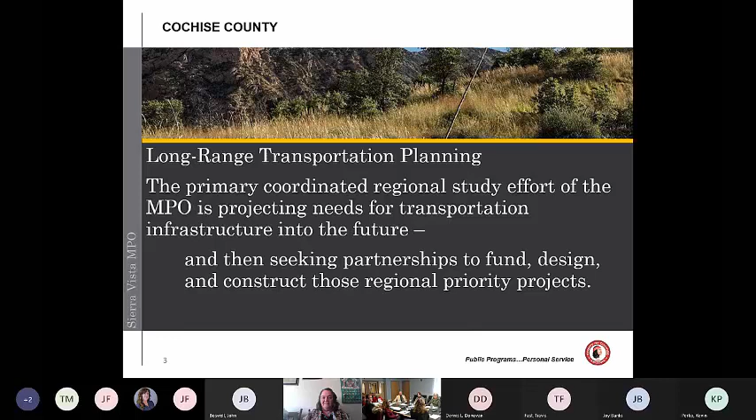These priorities are very familiar to you: safety, system preservation, regionally significant, those kinds of elements. From that came a prioritized list of the top items within the region that the MPO felt it should focus on from a study standpoint and a funding standpoint. We are primarily a planning organization with a tiny bit of funding for construction, kind of like a carrot, saying, let's all get to the table together.

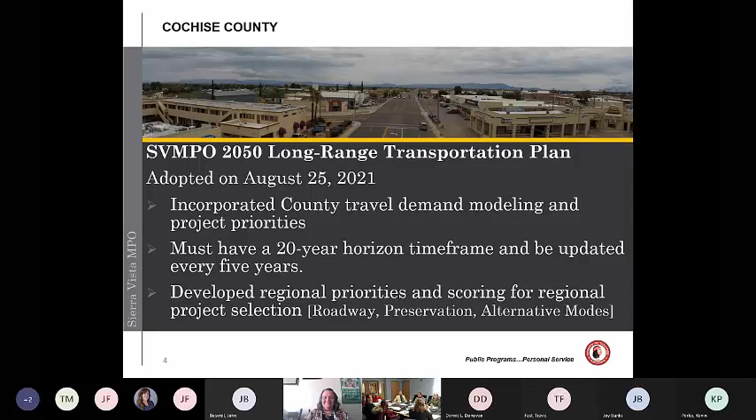The top 3 projects that fell out of this effort: one here at the county, Moson Road, which is very critical throughout the region; Theater Drive, a road jointly between the city and county; and Skyline Drive, which serves the fort and the landfill issues in the town of Huachuca City.

We began working on all 3 of these projects in what's called the Transportation Improvement Program, our 5-year program with our board. I'm sure you're aware that Supervisor Judd is your representative on our Sierra Vista MPO board and participated actively in this effort. There is an effort to look for funding through a state earmark.

That's what these two sheets are showing, just some draft stuff being used for advocacy and lobbying efforts. They are not engineered estimates or timeframes or anything; they're designed for outreach to state legislators. Just so you're aware of that.

What we've done is provided some funding for the design phases, the pre-design, up to 15%. The MPO has provided about $470,000 in planning funds to the county, and has set aside $1 million to assist with the design on Moson Road in fiscal year 23. That's this year, so we're really moving on that.

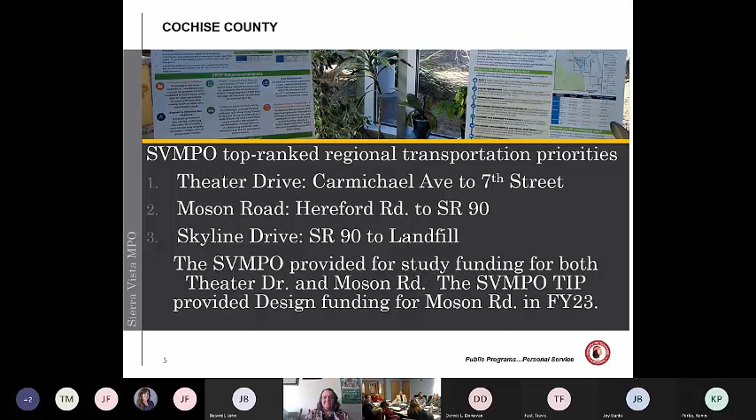So the purpose of this session is to help you understand those two projects. I think that's where we are at the end of that. We're going to jump right into Theater Drive and Moson Road, and Brad will take questions. We'll start with Theater Drive and let you know about that one.

Brad Simmons, I'm the engineering manager for engineering and natural resources. This is the Theater Drive inventory and roadway assessment. Our consultant for this project is Wilson & Company, who held our kickoff meeting in April of this year, and it is funded through SVMPO for $120,000.

It is a joint project with the city, working towards creating a more cohesive corridor through there, with a more uniform sidewalk, gutter, and curb. Our consultant looked at the feasibility of improving the roadway alignment, drainage, and the overall corridor itself.

Our main goals included improving pedestrian and bicycle movements, overall safety, and of course drainage.

Information gathered by the consultant included land use and zoning. This includes residential and commercial development that's out there - the Legion, convenience stores, and churches throughout that area. Also drainage, areas where basins would be appropriate, transit, bus routes, and traffic counts. There's approximately 1,000 to 1,500 vehicles per day that use that road.

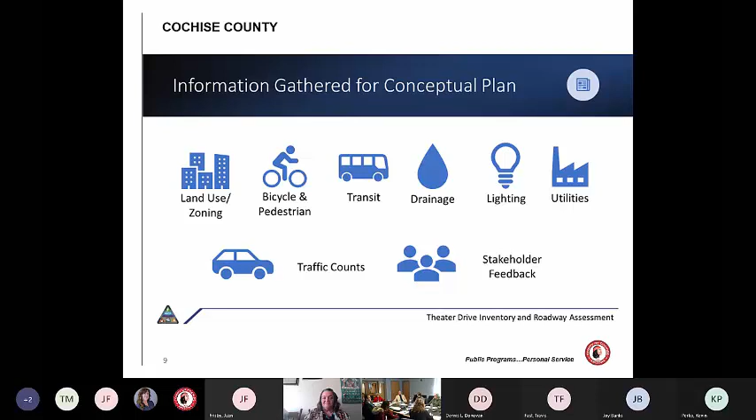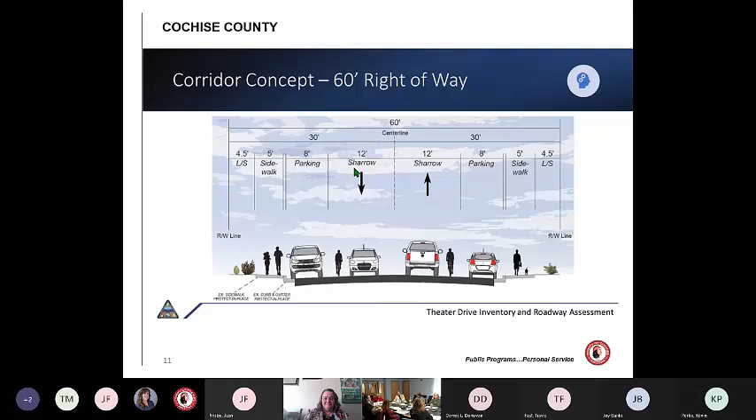Going to the cross section, this again starts at Carmichael, and we move east towards First Avenue. We have 60 feet of right-of-way here, so we've included on-street parking. A Sharrow is a lane marking indicating both bicycle movement through that travel lane, along with cars.

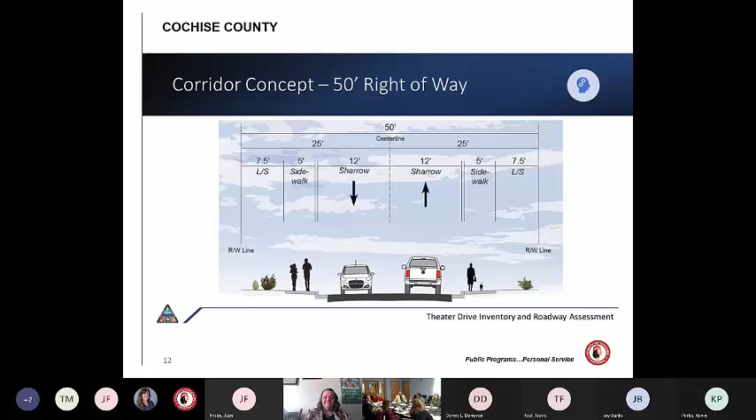Next, our right-of-way drops down to 50 feet, so we don't have as much right-of-way through the area from 3rd Street to 5th Street. So instead of on-street parking, we've included a little bit more landscaping in that area.

And then the closer we get to 7th Street, between 5th and 7th Street, there's a lot of businesses and homes that haven't allowed us to expand the right-of-way. So we have 35 feet in that area, but we've included sidewalk and 12-foot lanes.

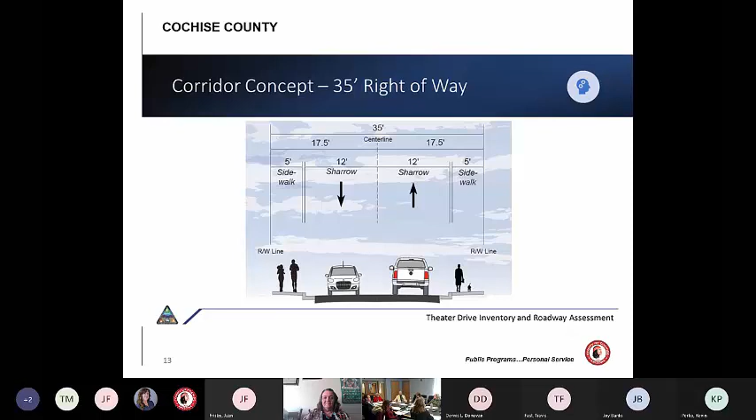So we're doing the sidewalk basically for the residents. There's a park on the west end and a convenience store on the east end, so it's to help pedestrian traffic, the sidewalk, and the bikes.

Are there any sidewalks there now? In the city section, yes - that's closer to Carmichael.

Our consultant is scheduled to be done by the end of January 2023, and they're finalizing the working papers, design plans, and cost estimates right now.

So the other project we have with the SVMPO is Moson Road, and the consultant on that is Michael Baker. This was just a scoping study to find out what improvements we can do to Moson Road. It started in July of this year, and then completed January, February.

We had a pre-scoping meeting to decide what needs to be done: sight distance with vertical curves on that road, the amount of traffic and curb cuts from the driveways, and then the real big dip section where Carr Canyon Wash crosses the road, which will either be a bridge or multiple box culverts. We looked at turning movements, cross sections, and stormwater - there are not adequate culverts on the road.

We will be increasing that to at least pass the 10-year event underneath the road. We'll probably still at times have water flowing over the road, but it will be a lot less than today, because we don't have relief in the washes that cross the road - some of them are pretty shallow, not real deep.

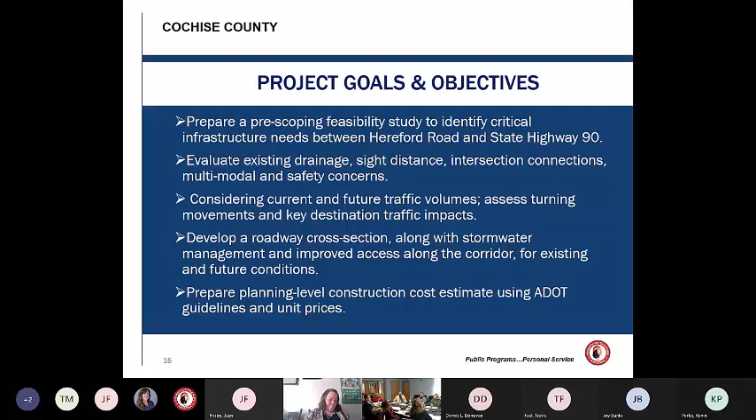We're acquiring right-of-way now. The county is doing that where needed - there are 160 total parcels that front Moson Road. Of those, we don't have completed, perfected right-of-way on 47 of the parcels. So the county is acquiring the right-of-way for those at a cost of approximately $500,000.

Then this year, we will do an IGA with ADOT and SVMPO and with the board to get the design funds from the MPO of $1 million so that we can design this project. ADOT, being that there's federal funds for construction, can probably provide $10 million to construct the complete project. We might have to phase that in depending on what kind of funding we can get through grants. So we will have an IGA, and ADOT will initiate it to get the design contractor on board.

And then we will go for grants. This is just an example. There will be a left turn lane on Moson at Ramsey. They're still studying if we'll have a left turn on Ramsey, and there are a few other major intersections they're still studying to see if we'll have left turn lanes or not.

We'll have some no passing zones, but with all the existing curb cuts on this road, it's hard to put in a two-way left turn lane, then you'd have no passing for the whole 9 miles, which people don't want. And to make it a 4-lane road, at this point there's not enough traffic to justify the cost. So that's Moson Road.

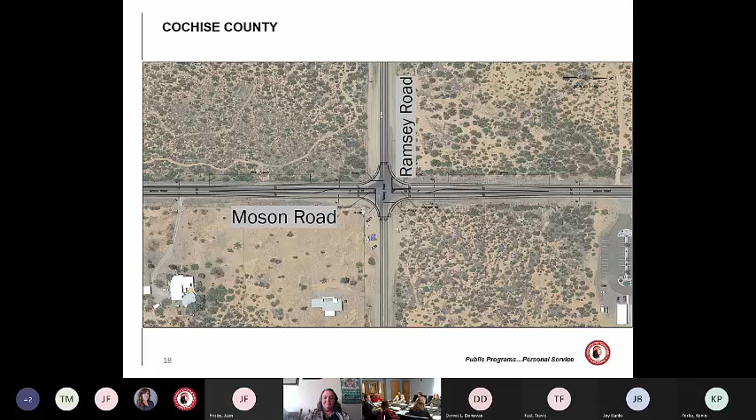For the county staffing, our right-of-way section averages about 25 calls a month, people inquiring whether they need a permit, asking us to clean out their driveway or culverts, which we don't do. The county does that in its operations, public works, but we don't maintain people's driveways. They get a permit from us to put in their driveway, and it's their responsibility to maintain it.

We have commercial reviews, about 12 per month, with development services, for special use on parcels, commercial use, rezonings, and right-of-ways.

For inspections, we have 2 inspectors, one for the northern part of the county, and they have about 41 open permits per month. An open permit doesn't mean just a one-time inspection — each permit takes approximately 3 inspections. Some permits have a year to get construction done, but if it's a utility it can take 4 or 5 months, so there are multiple inspections on that.

In the southern part of the county, the open permits number about 62, because there's more activity, more density of population, and more homes being built.

We had a total of 625 right-of-way permits this last year. Special events, we had 17, for bike events, run and walk events, and parades. We will be coming to the board next year to increase our fee for special events.

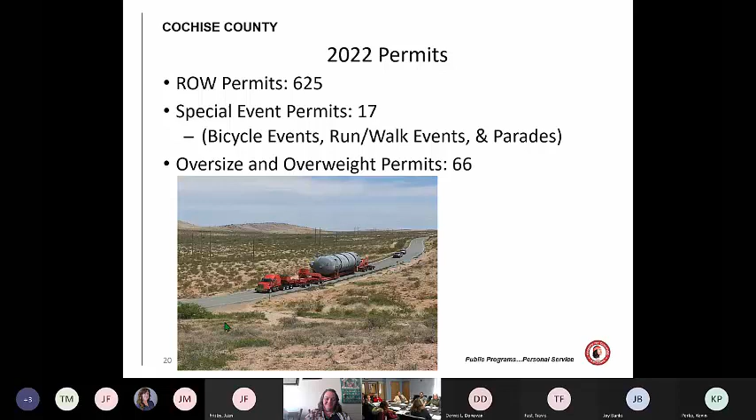When you have these wide loads, this is why Davis Road, with the POE going in, is the major corridor we have for freight. When a wide load goes through that's over 16 feet wide, DPS is running you off the road. This is why Davis Road is one of the higher traffic roads for semis, and why we need to keep the right-of-way clear, because when you're run off the road and it's stormy, they get stuck in the mud.

Just past here, the drainage ditch is about 3 feet deep, and if it's running full of water and you're not from the area, you don't realize that — people have gotten stuck. This is the load, so half the car would be here, half the car would be back on that, but you would have to get completely off the road. So that does make it a concern with safety on this road.

We're updating our signposts to square tubing. This will make it efficient when signs need to be replaced, and this is a 10-year project. This is year 1 of it.

We've completed Charleston Road with the square tubing, installing 386 anchors and posts. When a sign gets hit today, or wind damages the U-channels we have, they twist the post and snap it. The square tubing is sturdier for resisting that twist.

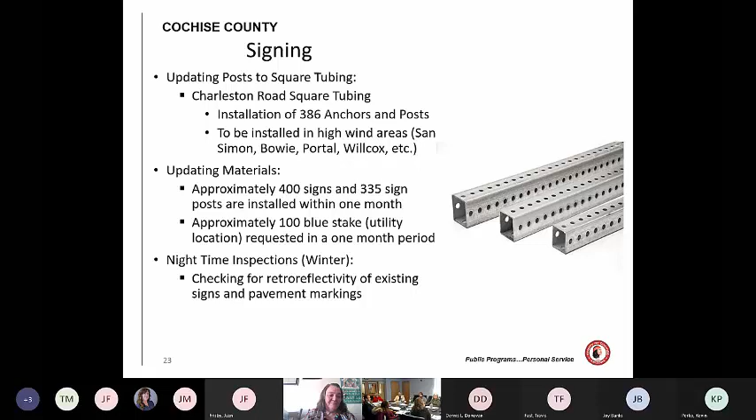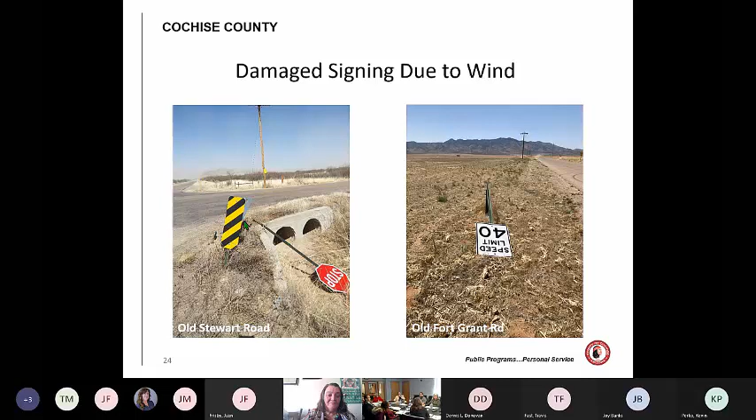This is an example - this sign was on Old Fort Grant Road. It was probably damaged from the wind that just snapped it off. For stop signs, we put them on barricades when they're down, but with the new system, this sign would already be up.

In structures, we have 60 bridge structures inspected by ADOT. Of those, 2 are rated functionally obsolete - meaning you wouldn't design the bridge like that today, like Hereford Road Bridge, which is a 1-lane bridge. It's a brand new bridge in the last 10 years, so it's structurally okay, but obsolete because it's 1-lane.

The 5 bridges that are structurally deficient need to be repaired - they're old, a lot of our bridge structures are over 50 years old. We're going to hire a consultant to rate those bridges, come up with a design, and give us a 20-year replacement plan, since we don't have structural engineers on staff. Some of them are bridge structures and some are box culverts.

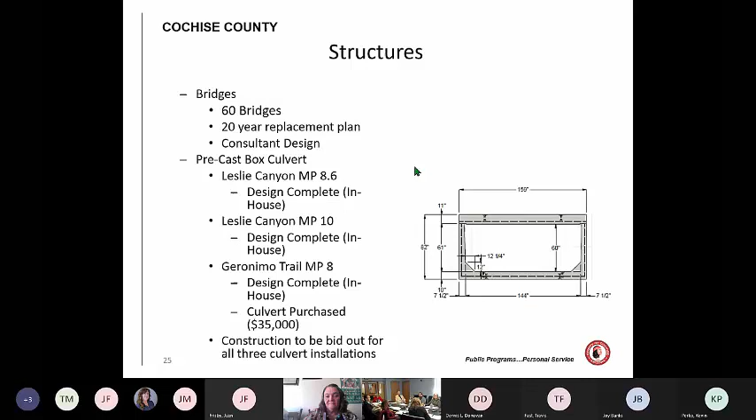This year's project was replacing box culverts, which aren't rated as bridges - they're just smaller box culverts. On Leslie Canyon we had 2, one at milepost 8.6 and one at 10, plus Geronimo Trail at milepost 8. We've completed that design in-house and are finalizing specifications in January, then we'll advertise the project for bid by February, doing all 3 culverts at once to save on mobilization costs since they're close to each other.

This year we added a pavement section on Shelton Road at Kansas Settlement Road, widening the turn lane so semis don't have to swing wide to get back into the lane. This was done in cooperation with the dairy - there was an overhead power line and pole we had to relocate, and they helped pay for the cost of that relocation.

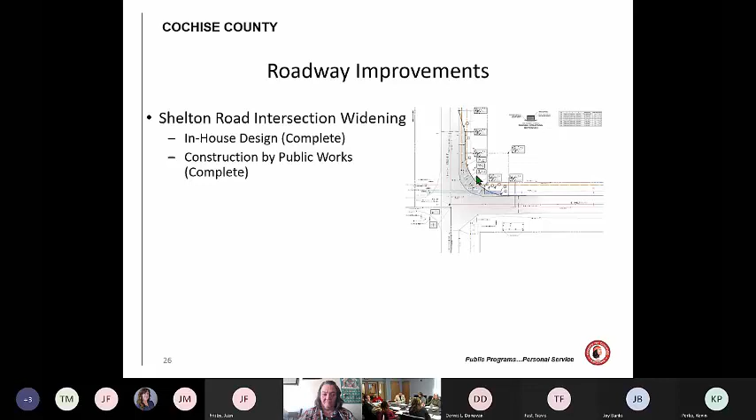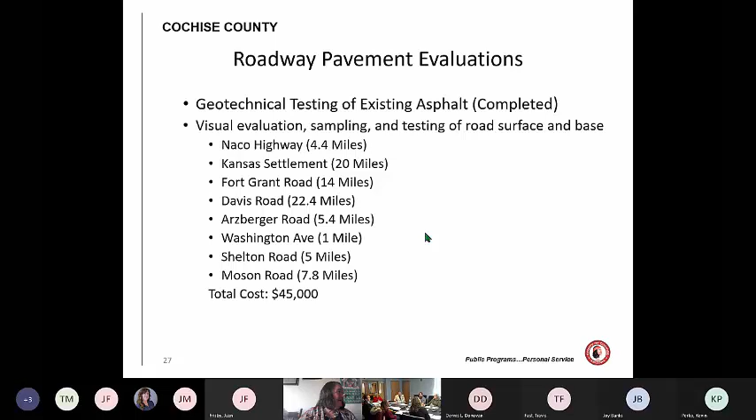One road we need to address is Washington - we did chip seal it, but I think we need to add asphalt on top of that. Davis Road has 3 different projects on it. From Central to 191, we have plans 95% complete that started in 2015-2016, and we're acquiring right-of-way on 10 parcels now.

And that is with the new port of entry. This is to increase the turning radius there at Davis Road and to upgrade this road to a 2-lane section with 8-foot shoulders, so when those wide loads go through and run off the road, at least there's pavement to go onto of 8 feet so you're not running into the ditch.

The construction for this would be a minimum $2 million, up to $2 to $3 million. For the plans, we need to go back to the consultant just to finalize them.

With the new port of entry going in, they anticipate we could get a 50% increase in truck traffic. Some of the existing traffic from El Paso and Nogales, they anticipate, will come to the Douglas port of entry.

Then we have drainage structures. There were 3 projects on Davis Road, at milepost 5, 9, and 13. We've completed milepost 9, so at 5 and 13 the projects are designed. We have the right-of-way, we just have to update the NEPA clearance, which is pretty much just a letter. The cost of those 2 projects is $6 million.

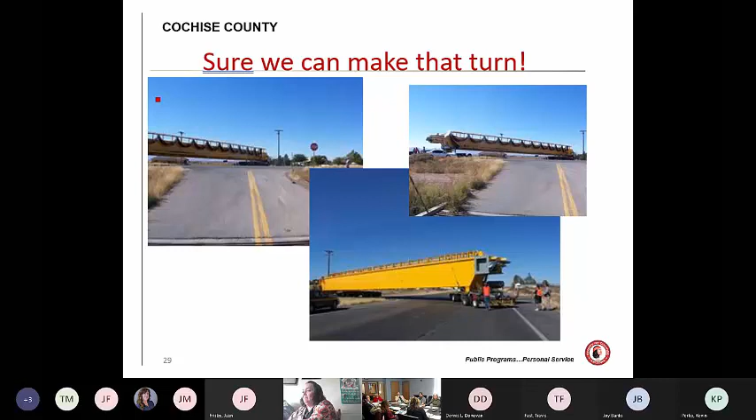And so then they shut down eastbound traffic to go westbound so you can take that on-ramp as an off-ramp to get on 80. And then it goes to Davis Road.

I believe, Chair English, you were at the public meeting we held in that area where we had an at-scale drawing of this intersection with little vehicles and trucks. By the end of that meeting, very quickly, everyone had 100% agreement that intersection needs to be improved because they couldn't make that turn. So this is Davis Road, and this is the alignment.

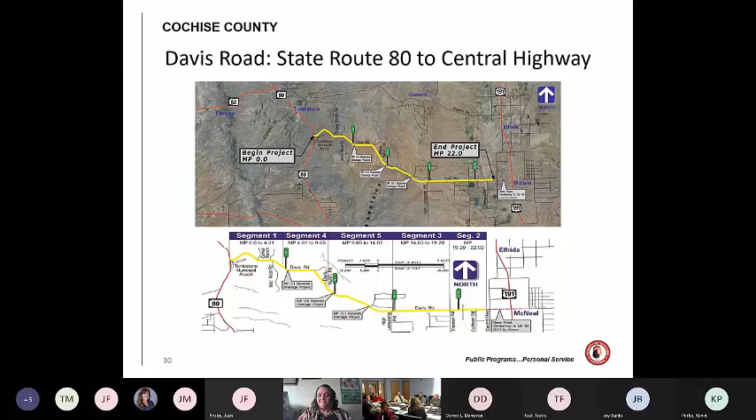We have some sharp curves here that we will lessen to widen the radius. This is milepost 5, this is 9 that's already completed. Those are where the roads are, the culverts we're doing for the watersheds. This is 22 miles of road and only 8 culverts underneath the road, excluding milepost. But it lacks a lot of drainage on that road. There's a lot of places that it just goes over the road.

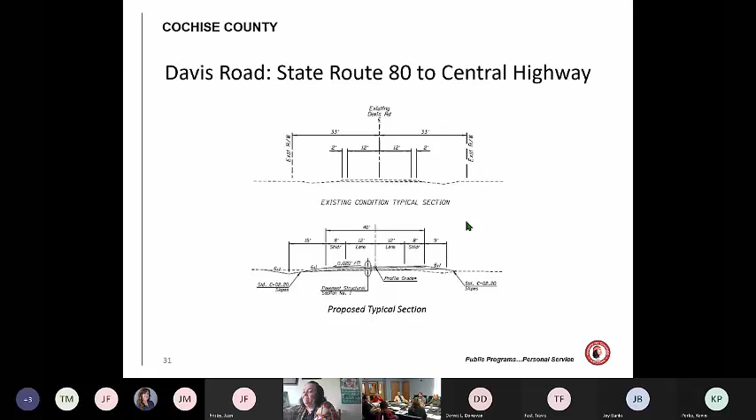So this is the existing road, two 12-foot lanes, a 2-foot shoulder. The future road will have two 12-foot lanes and an 8-foot paved shoulder for the safety of people getting off the road. We also have a 6-to-1 slope on the shoulder for single vehicles that run off the road. Hopefully then they won't flip, they'll stay level.

And then this is Davis Road itself, just some of the deterioration. The asphalt is minimum 20 years old, but you can see crack sealant here. Then you chip seal it and you can't see the cracks, but it's still deteriorating because of the heavy traffic. So we do need to mill and fill the asphalt on this road, and we found that information out when we did the testing on the roads.

Any questions? You said 20, isn't it more like 40? Well, the paved section from 191 goes into Leslie Canyon Road, but we're not doing anything on that part of it. I meant when it was paved to begin with, wasn't it like 40 years ago? Oh, some of it could be, had to be. This last part that they paved, from like '47 I don't have it written down, but there were multiple different projects on that for maintenance.

Okay, any questions or comments? Mr. Maddox, is this PowerPoint going to be on the county website? Supervisor Crosby, it is posted on the...

Any questions, Ms. Judd? No, it's very exciting to see what we're doing with our roads, and I always wish we could do more, but it's good to see it and understand how much it costs. Even if we got some of the multiplication by 100 today, that was just fun, but it makes us think. Anyway, I really appreciate it.

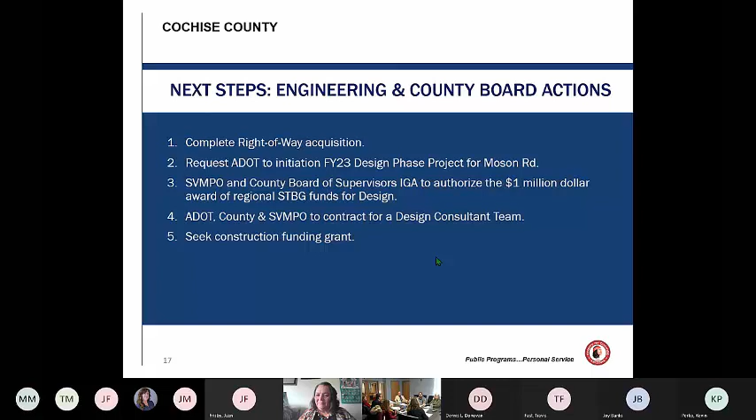If we could go back, everyone just think a minute about Theater Drive. Sierra Vista and the county have worked really hard to improve that area, clean it up, get property fixed, taken off the rolls and taken out of there. This is the culmination of a lot of work they've done in that community, and it's a major road into that community that has been improved. I think we should all be really proud of the work that's been done there. So I wanted to bring that up. Thank you.

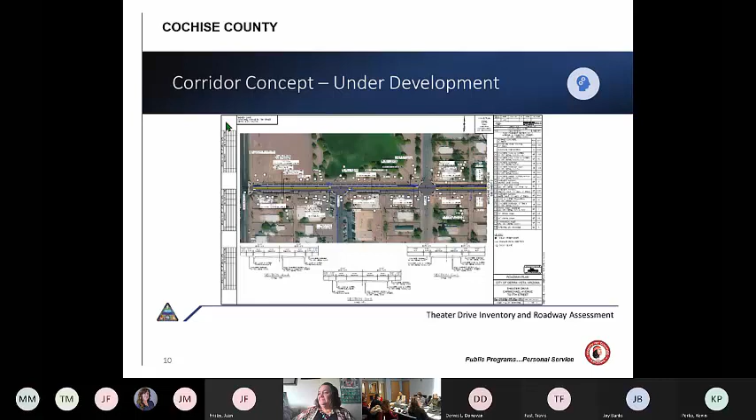Any other comments, questions? Thank you for the update on engineering and natural resources. I think it's your engineering brain that keeps adding those zeros, because every time we look at a project, it's got more zeros than before. I'll keep going up. I thought it was kind of typical when you showed me one of those, that the engineering cost was more than putting the project together. Some of it's a lot of study phases. Yeah, $2 million to study it and $1 million to do it. So, thank you.